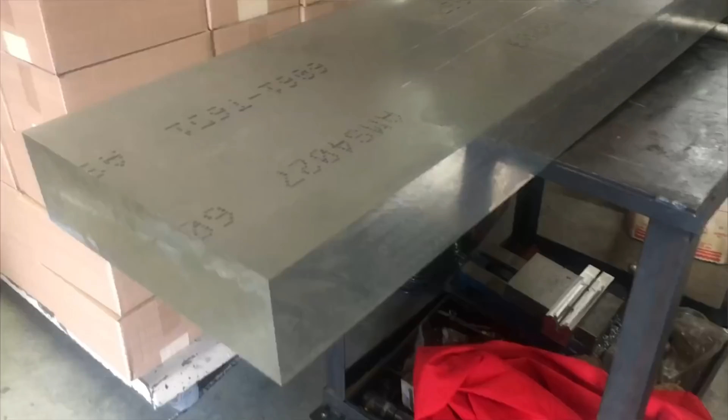All right, this is the starting point right here. This thing, I've got it so we can roll it, but this block of aluminum weighs 375 pounds. We're gonna turn it into a wingtip. Crazy.

There's the part getting close to being done. I'm actually milling in the fence at the same time around the entire wing. So I've got Draco's current wing on this side, and on the underside, hiding under there, is the shape of the new wingtip extension, which is a slightly different shape.

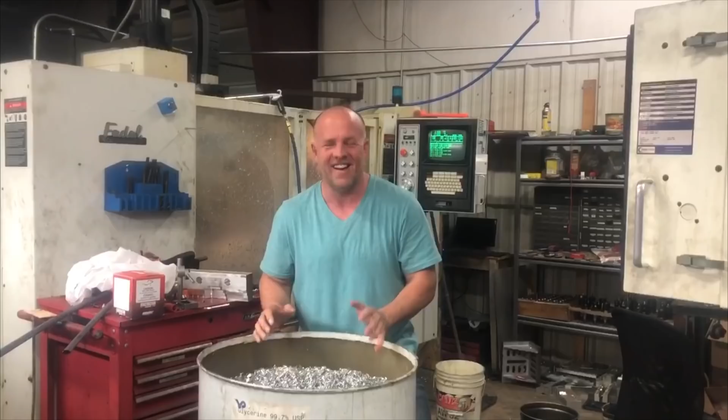All right, so I'm cutting out my new adapters to attach my new wingtips I'm building for added fuel. This bucket was empty when we started, and this is the third drum we have filled up. We started with a 375-pound block of aluminum, and we're gonna end with a 9-pound part. So we got a lot of cutting to do.

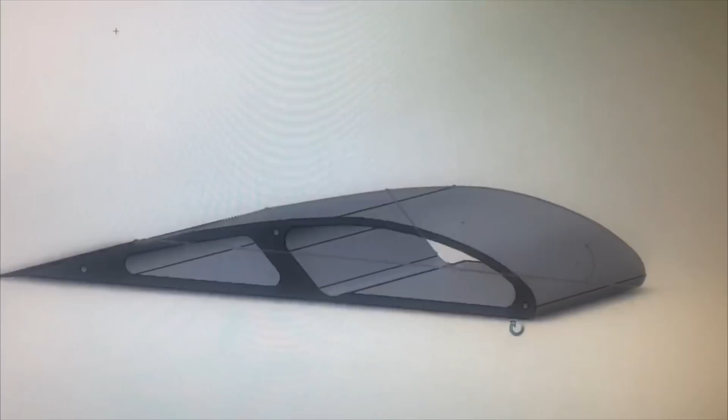All right, what I'm doing here is I've designed my new gas tank area. This is the whole wing. I'm gonna carve this out of foam and then lay it up layer by layer. So the little trough right here, that is the low point of the fuel tank, so I can drain it right to the bottom.

All right, so let me tell you what I've been working on. Started this yesterday, last night. The horizontal on Wilgas are really loose. The verticals are really solid, but the horizontals, if you wiggle right here, it actually drives me nuts.

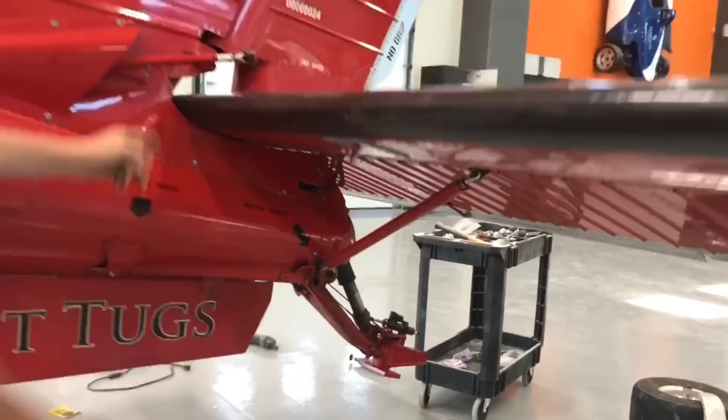All aircraft do this if you go full throttle with your brakes on - you can watch even a Cirrus, a really well-built plane, that tail will move like that - but this one moves too much. The problem is they did a great attach point back here, a big support strut at the back, but in the front right here, they have one tiny AN3 bolt that holds the entire front of this horizontal. So it has way too much movement for my liking, and it showed itself up after years of the Wilga being out.

They came out with an AD to continually inspect that single bolt. There's so much movement right there that it fatigues the aluminum and they crack. So it's part of an annual ongoing inspection. I'll keep the inspection going, but I'm gonna fix it so I never have a problem with it.

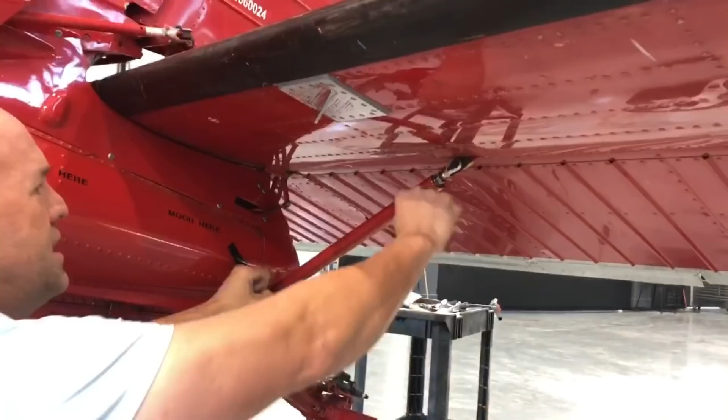The way to do that is to convert this wing and support it like you would a main wing on a bush plane, like a Cub. So instead of just one triangulated brace right here - this brace stops the movement this direction only - the tail can rotate this way and it can actually oscillate.

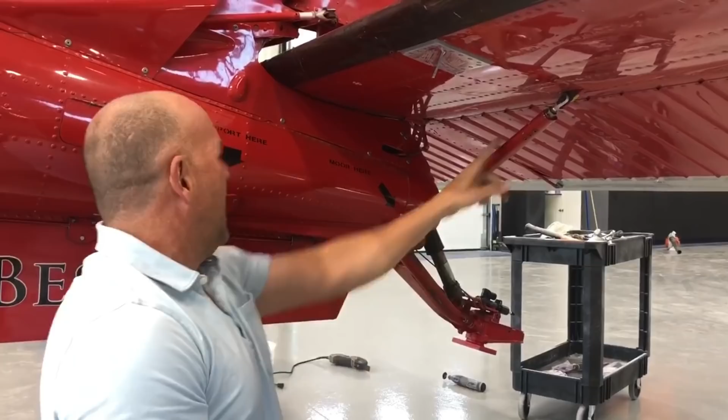So to fix that, I added this bracket right here, and I added this bracket right here. Machined this up yesterday, and then I'm gonna connect these 2 points right here. When I connect this up to here, I'm coming up on a triangle, and I'm triangulating this. So it's a teeny bit more drag.

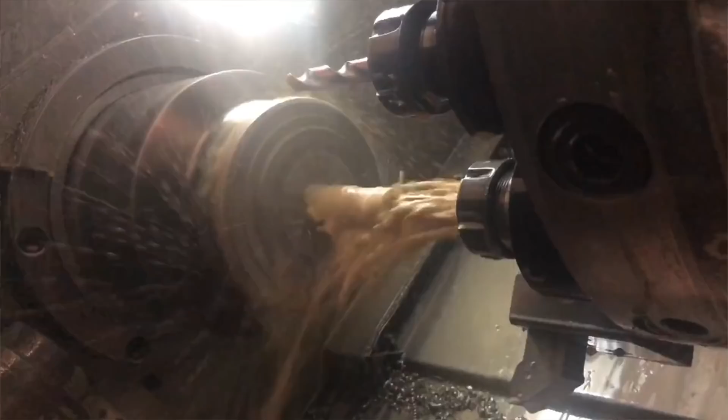Draco's not gonna care. So I've got 2 brackets done, they're installed. I turned these up last night real quick. I made these out of just solid aluminum rod. This is just 065 aluminum.

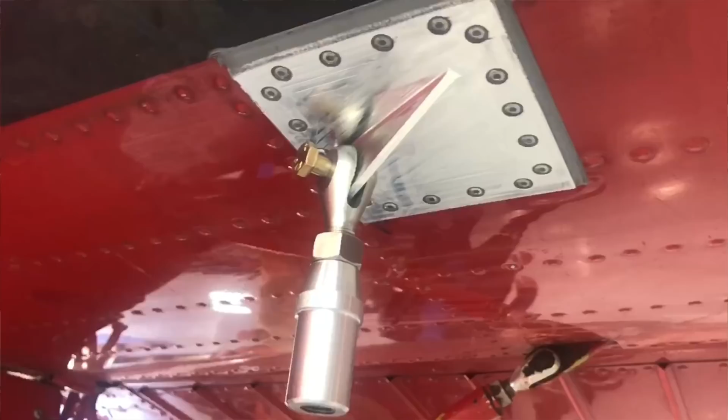You can see that will just insert in there. And then I made these. These can insert into here, and these will attach to their brackets that are on there. So I'll put these all the way in, and there'll just be a few threads showing and a lock nut.

But this, I can now cut, put another one on this end, and after I get that done, I'll make an airfoil on the back. So this is a really fast project. Part of one evening, a couple hours this morning, I'll have this up and flying, and we'll lock this tail up.

I'm getting ready to go to Alaska. It's right around the corner, so I'm gonna quickly knock out a couple of wingtip extensions. There's a leg going from the US over Canada into Alaska. I don't wanna have to stop and do customs twice in each direction. So I'm gonna enlarge my fuel tanks.

It can already make the hop, but if there's a big strong headwind or I got weather or this or that, I just don't wanna be landing with a half hour or an hour just in minimums. I wanna have a couple hours of spare fuel on board. So I'm gonna make bigger wingtips.

I was at one point going to do 3 foot longer wings when I originally built Draco. The stress loads of the original design couldn't handle it. So these are just going to be about 2 feet longer. And to handle the stress loads, I'm going to lower my gross weight whenever I'm running these wingtips. So I can't throw in 4 people, all big men and all their bags, but I can still carry 4 people, and if they're lighter people, some bags as well. So I got to adjust a lot of math, but let's make some wingtips.

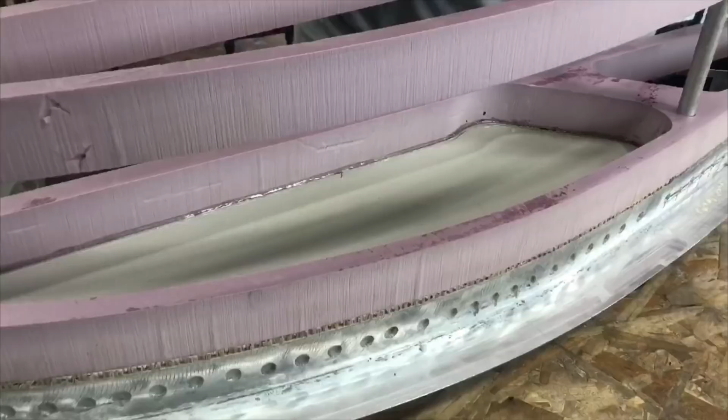What we've got, I made this the other day. This is an extension. I can pop this off, unscrew it, slide it off, and then quickly install these bigger gas tanks. So these are wingtip extensions with enlarged tanks. So what I'm gonna do now is I'm gonna start laying up e-glass down this side, wrap it over, slide this down, do another one, wrap it over, so there's lots of little glass ribs all the way down.

Now, you can't get carbon fiber or fiberglass to bond to aluminum and expect it to stay. It works for a minute, but then big temperature changes happen. Glass, carbon, and aluminum do not expand at the same rate. Glass and carbon, similar. So what happens if I take off here, and I go to 28,000 feet, which Draco is capable of -- it could be 110 degrees here, 50 below 0 up there, and it's not if, but it's 100% certainty: the e-glass bond, chemical bond to the aluminum, the expansion rate will change, and the two will shift, it'll pop, and the e-glass will come off the aluminum.

So you can see all these holes I drilled down here. That's so that I can actually have a physical bond. The way that's gonna work is the e-glass is gonna go down and bridge over those holes, but resin and glass will dip into each of those. That's one form of bond. As we layer it up, it'll get thick, and then those won't be able to pull out of that. There'll be another piece of fiberglass on the backside. The two will dent in and touch each other so that they're pinching the aluminum in between.

Then I'm gonna go a second level beyond that, since this is a fuel tank and I want it permanently attached to the aluminum. I'll do several layers, then I'll rivet them together when it's just e-glass. Then I'll go back over and add carbon fiber to the whole thing. So I'll have a hole bond with e-glass on both sides of a hole connecting in the middle, and then I'll have a riveted bond, and then I'll have the carbon fiber layer. When it's done, it won't matter how much they expand and contract -- that chemical seal will pop, there'll be a hairline in there, that's normal.

The actual connection will be rivets and the pass-through holes. So that's how we're connecting it. It's a lot overkill, but that's the only way I feel comfortable on a wing. So we'll be able to take this wingtip on and off with aluminum fixed points. So let's go ahead and get started. I'll start laying this up, and we'll get one of these tanks out of the way and get the other one done soon. Back to work.

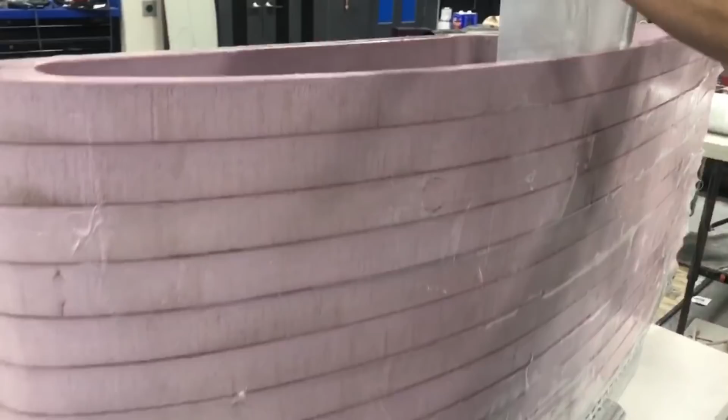All right, that is a slow process, but I'm almost done. Kind of show you how I've been wrapping this up. Coming over here, you can see what I want is I'm having some e-glass between every single layer. So the way I've done that is I put on a layer of the foam, I lay a sheet down, pull it tight, peel it off, peel off the plastic. This is the plastic peel ply.

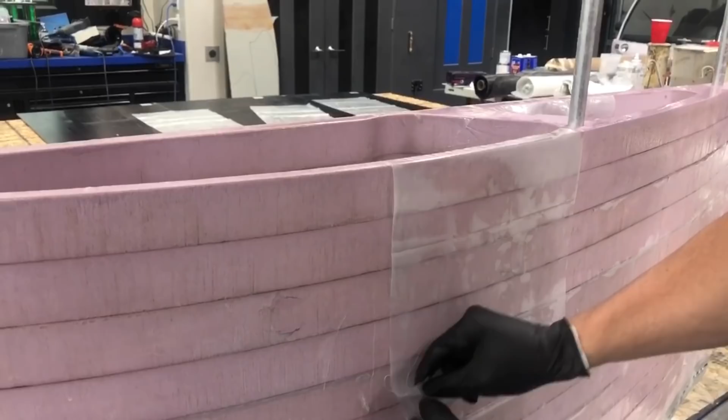Wrap it down inside. That hole down inside there is the gas tank. And now I can just smear this down.

So I got a lot of cleanup work to do. I'm gonna have to go through, use a brush, dab all the air bubbles out of it. By the time we're done, we'll get all the air bubbles out, dabbed in with a brush with resin on it. We're gonna let it sit.

That's just the start. It gets us all our little ribs between every single layer of foam. At that point, I can actually dip this in acetone and eliminate all the foam core and save another about 2.5 pounds. I'm not gonna bother doing that, but you could, because the E-glass is going between the foam and down. It's basically making a separate fiberglass square box over and over and over all the way up.

So I got a lot of work left to do. I'll finish the last layer, get ready to cap it. Tomorrow we'll sand it, prep it, clean it, put a thin layer of micro on it. Then I'll carbon fiber it in big giant pieces. I can get that on, bag it and make it really tight. That'll be the structure. This is the starting point, but when it dries, none of this will move.

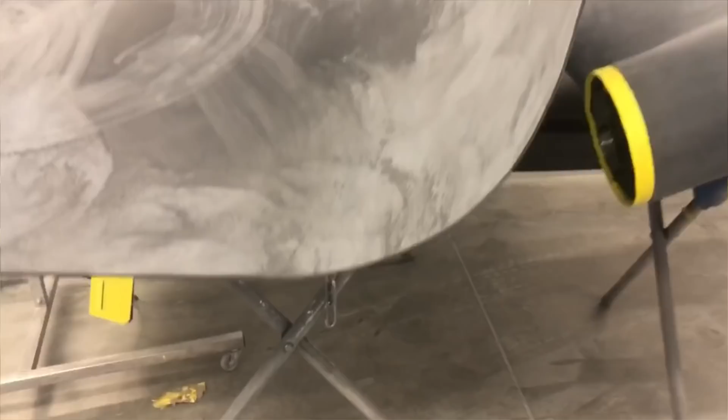So I'm about to the point where I can drag these out. They don't need to be in there, they're unnecessary weight. I covered these in wax so I could drag them out. But I'm about 50% done. One more to go. Back to work.

So Draco's been flying and it has been perfect. But like any build I've ever done, there's always something I want to do a little different. And this time I didn't need to do it, but it just makes life easier. I put in a really fun filtration system, and when I say fun, it's because I feel a lot safer.

I pulled the cowling off, opened up the filter box, and I can't believe how much dirt and dust and weeds were in these filters. I didn't need to clean them yet, but I wanted to look at it anyway. And then I realized, oh my gosh, it takes a couple hours to decowl the plane, pull it all apart to do the filters. I don't want that to deter me from replacing or cleaning filters more often.

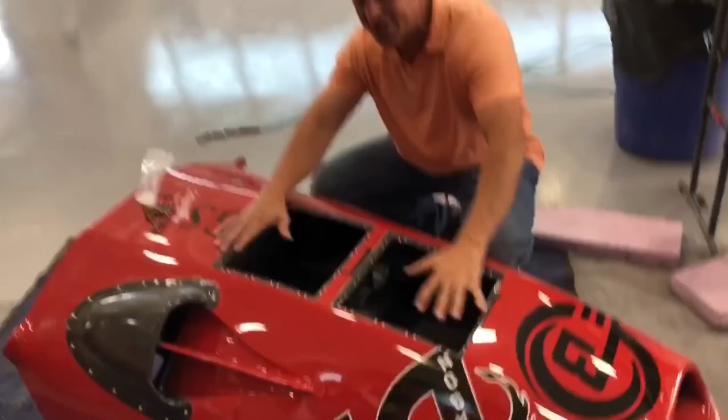So this is what I decided to do. There's two brand new giant holes in the plane. This is a challenge because I didn't want to repaint the whole cowling.

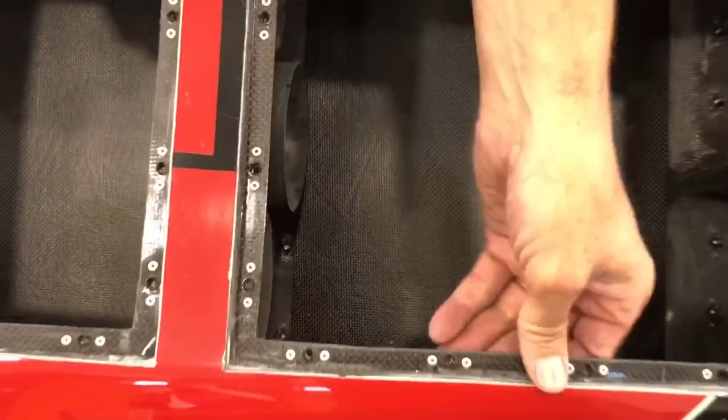So I had to cut this out freehand. Then I flipped it over. I put new layups, these lips on it on the inside here with these nut plates. And I built a removable bottom. Instead of servicing the filters from the top by pulling the cowling, I can actually leave the cowling on the plane.

So now I can do the cowling, the filters real fast, pull the screws, pop this off, pull out all the massive filtration system, replace them, put this back on. I don't even have to decowl the airplane. So I didn't need it, but why not? So let's get back to work.

Midway through about all the parts at once. So I'm trying to jump between parts so one can dry, move on to the next and not stop. So far today, never had to stop.

So right now, I just finished laying up all the carbon fiber layers on our waxed up wingtip to make our new wingtip. And I'm just putting on the peel ply. The peel ply simply goes on, squeegee it tight, pull the resin out.

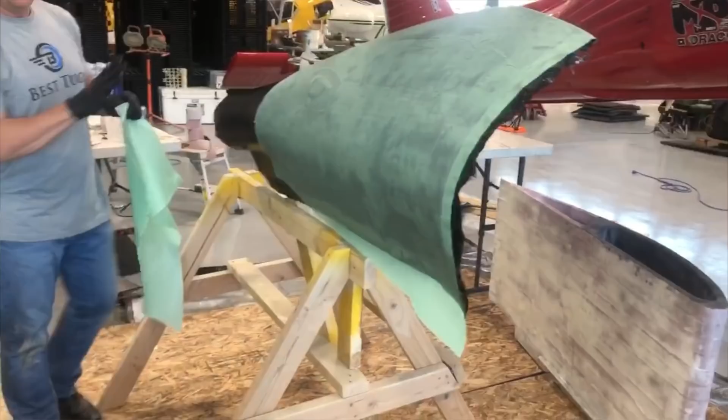As soon as I finish this, I'm gonna take it, carry it outside, and this is kind of a funny trick. This won't fit in my oven. I just have a small oven. So this is a 2-part epoxy, and it's gonna cure on its own, but I'm gonna just take it and put it in the bed of my truck.

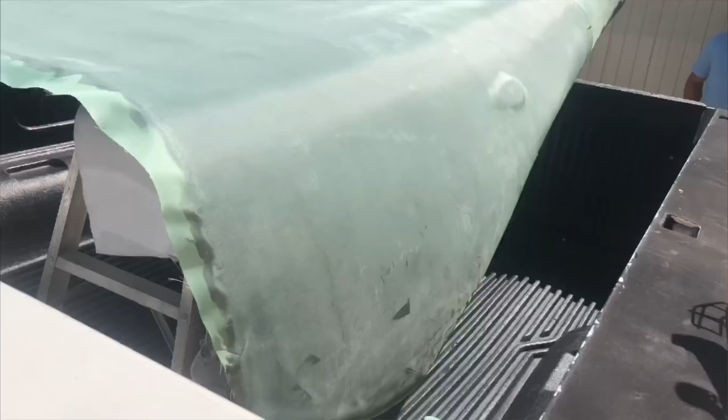It's got black bed liner, and you put it outside, and I can set this thing off, and it will take only a couple hours to completely cure rather than overnight. So it's like a mini oven in the back of my truck in the sun, so it gets really hot. So that's what I'll do. After that gets in the bed of my truck, I've got the gas tank ready to go.

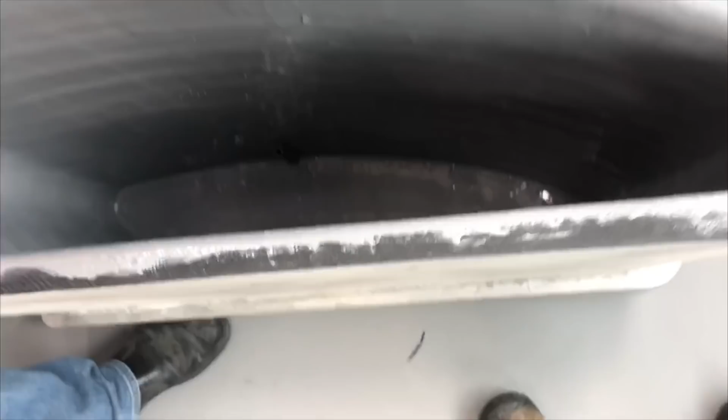I've got my lid for the gas tank all sealed up, with the edges left for my Hysol joint, and the tank is all finished. We've got multiple coats in there. I'll Hysol that on, and once that's Hysoled on, the glue joint is plenty strong, but just to be safe I'll round these edges off, then wrap glass or carbon all the way around the edge so it bonds to here. Once that's done, the wingtip can go on, comes out to make the tip and the light, then I'll wrap the whole thing in carbon together so I have a single piece carbon all the way up around the wingtip, and that'll close it out. But we're getting close. Back to work.

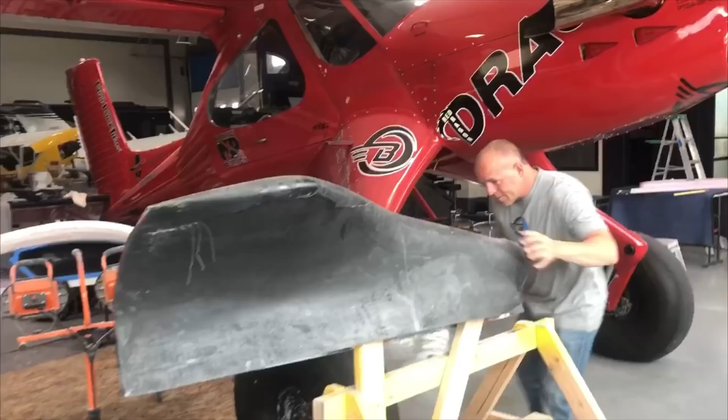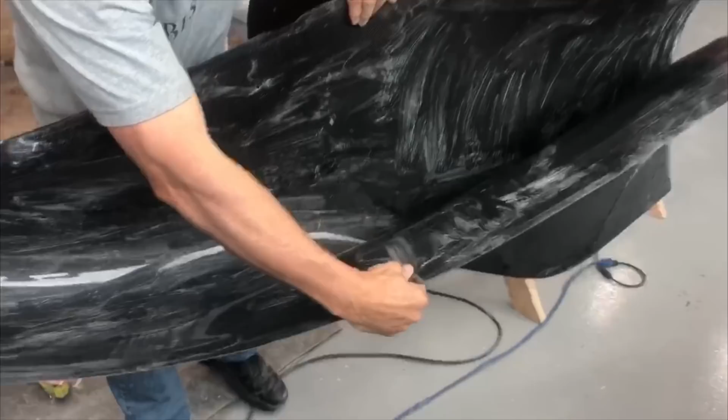That worked out perfect. See the inside of that? The wax, perfectly smooth. That will be the new wingtip. And we haven't even hurt the paint, so success. I don't have to repaint my old wingtip, it's in good shape.

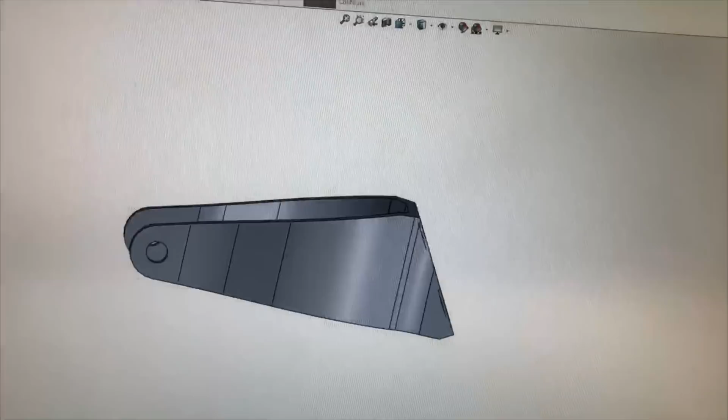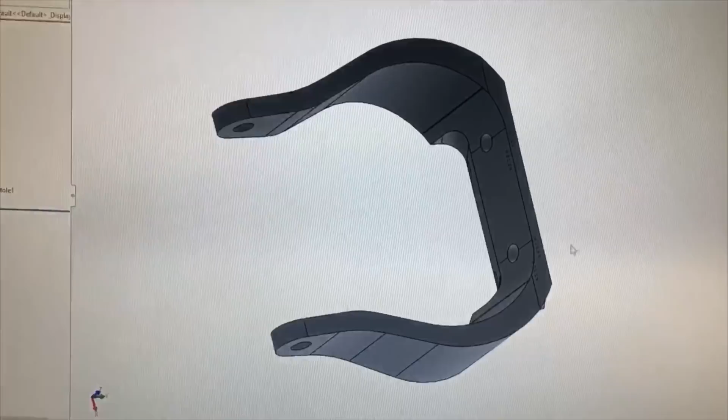All right, so my tail fork wasn't quite strong enough. It was for a lighter weight bush plane, and of course you can't buy one for Draco. So this is the new drawing of a stronger tail fork assembly. I made a really big one for my giant tail wheel, about an 18 inch tire. This is for my 12 inch tire, and I have a quick interchange. Right here I've got these 4 bolts, and I made an adapter plate so I can quickly swap the 4 bolts and change from my sand bush wheel to my traditional bush wheel. So now it's time to cut it, but I think we're good to go.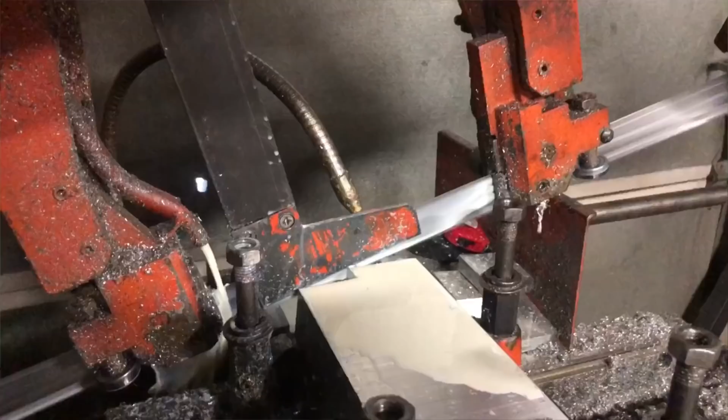All right, sometimes we get really lucky. This chunk of aluminum right here was part of the giant remnant from cutting out my new wingtip I'm building. So, free part - we're gonna cut the points off it and machine it into my new tail wheel fork for my smaller bush wheel, so I'll have 2 different size bush wheels. We'll get this cut and start turning it into another part. Back to work.

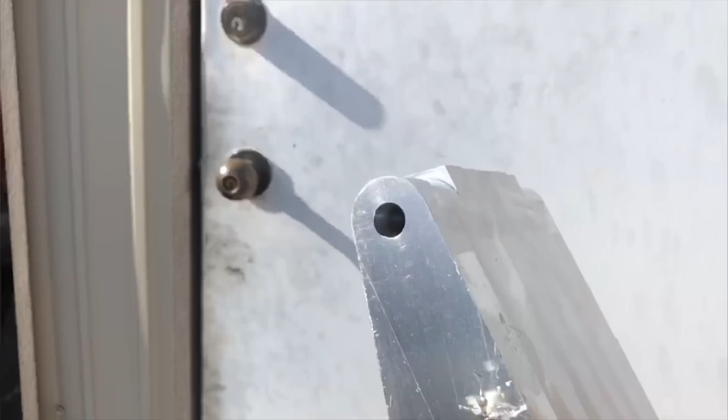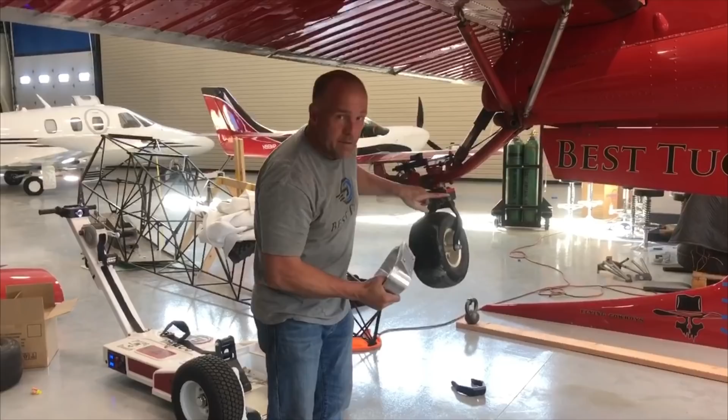All right, the new fork's done, so I'll show you what we did. We lowered the length here because I had way too much clearance on top. Draco's a bit heavy for this fork I had on here. This was one I was able to buy elsewhere, but it's thin here, and if I got on a really heavy side hill with a lot of fuel, you could see it flex and almost touch the tire. I had to make an adapter block to get it to fit this fork assembly. Now all this we already made, put a dampener on, but I want to get more angle of attack. So this new fork has been done thicker here, shaved here, dropped this. I don't need the adapter. I matched up a bolt pattern to a permanent plate that's hooked up to a bearing set to my shimmy dampener. So this is going to go right here, and you can see how much lower it's going to drop the tail of the aircraft, giving me more AOA. It's going to be awesome. Let's get it installed. Back to work.

All right, I'm leaving for Alaska in a couple days, time to go. You know, you don't always get it drawn up exactly the way you want. I missed this part - after I got it, it's actually really quite light, a very strong new tail assembly, but I realized I could pull some weight out of the middle. So sometimes you grab an old hole saw and knock out a couple ounces. Took 20 minutes, but definitely worth losing that extra weight. So I'm gonna go put my fork on. Back to work.

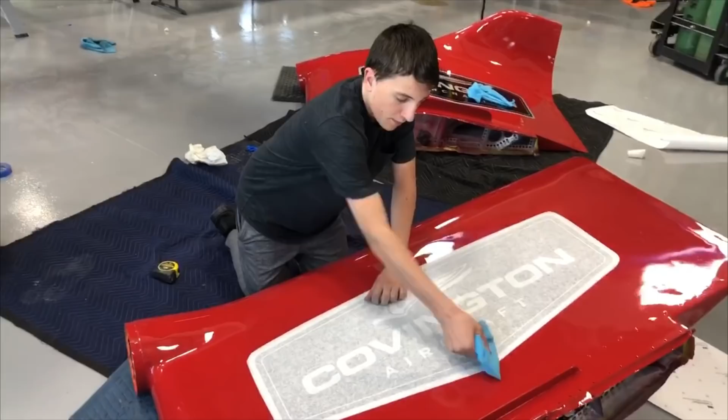Man, I am really happy with how these wingtips turned out. If you guys ever need a turbine engine overhaul, Covington has been really good to me. But Dex is a stud, been working late with me, late at night - he was helping me wax the plane last night so we can take it to Alaska and get it dirty.

All right, officially done. I got both wingtips on, got all the screws in, everything's torqued. It's pretty awesome to build something out of cut pink foam from the hardware store and carbon fiber, but it's done. I got to hook up the fuel line, the vent line, put the cap on the top of the wing, and fill it up with gas, go flying. I'm excited. Let's get back to work.